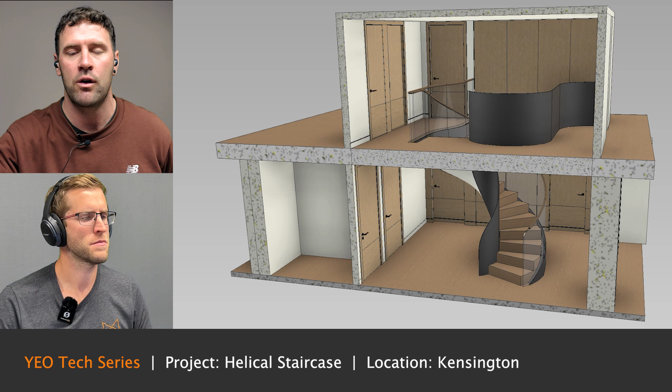Hello, this is the YEO Tech series where we delve a little deeper into the awesome front end of our business, which is the technical design department. Today we are looking at a very exciting project, a helical staircase that we are currently undertaking on a lovely project in Kensington. It's part of a wider joinery package, but this is the jewel in the crown of that project. This is currently on site, in the workshop and on site.

And we are here today with Rob. Hello, Rob. Hello. All right, buddy.

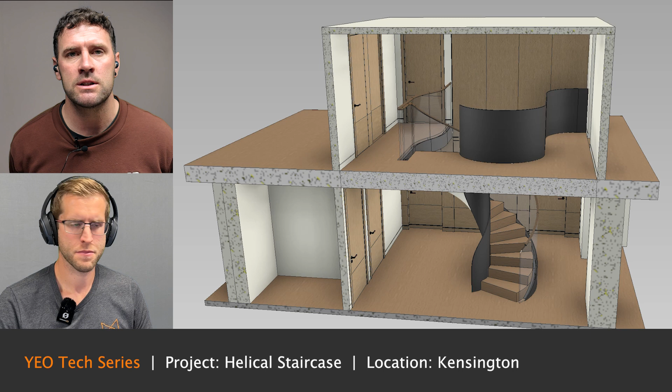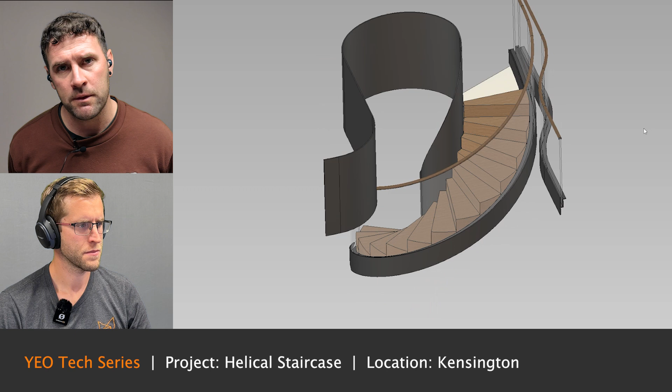Rob is our staircase master in-house, and he has taken the model work of this staircase from point of design conception through to it being made and going to site. Our involvement in this is we were heavily involved in the design of this staircase. It was a collaboration with the architect, RJH Architecture, and very much a development and partnership with them in bringing this to where it is today. We are managing the whole process from working with the structural steel specialist through to the handrail company, curved glass, and everything in between.

This is currently on site. The structural steel work is in, the handrail has been templated, and we're making the treads as we speak. So there's a lot to bring together. Rob, I'll hand over to you now, mate.

How the hell do we start? Where do we start with a project like this? It doesn't look the easiest to draw.

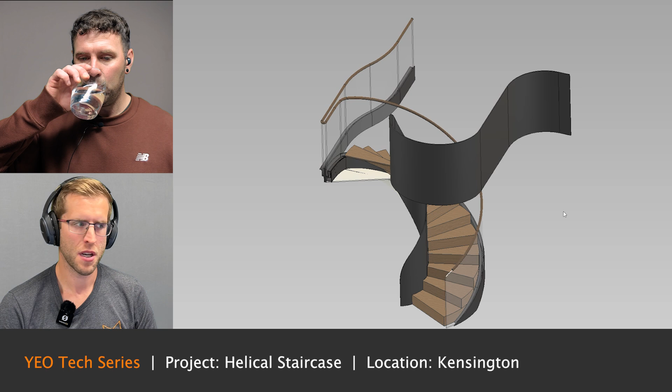No, it kind of didn't follow how we'd normally approach the design of a staircase. We had a design brief and some reference images of what the client liked and the sorts of things they wanted to achieve. So rather than focusing too much on the structural elements and how it integrated with site, I really focused on how to achieve what we thought they wanted from a design and aesthetic point of view, following a few basic principles with regards to a helical staircase. There still needs to be a minimum amount of space, and rise and going still need to conform to regulation. So it was a case of starting with the basic principle that it's a helical staircase.

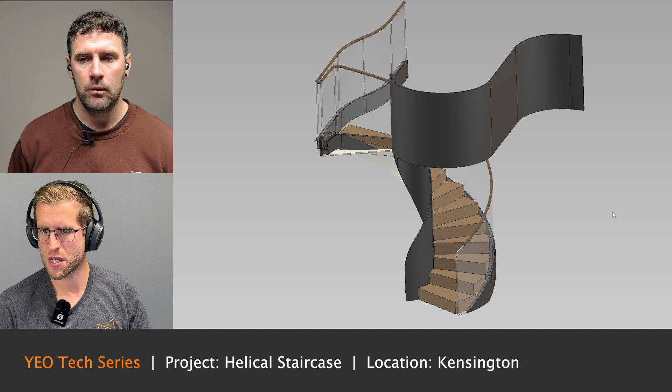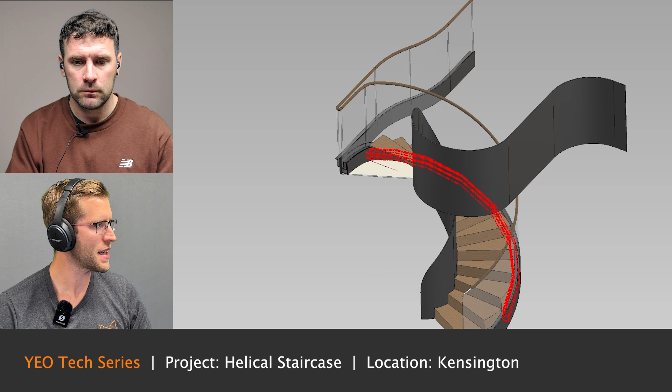We worked quite early on with the specialist metal workers to establish the basic requirements they need, the section sizes of steels, the size of plates, to make sure that from the very beginning we weren't creating something unachievable. One of the first things we did was look at the basic section required for the staircase. So to roll it back, you start with this, which was the section that, through discussing with the specialist metal worker and the design we were trying to achieve, is the kind of section of the staircase that we came up with.

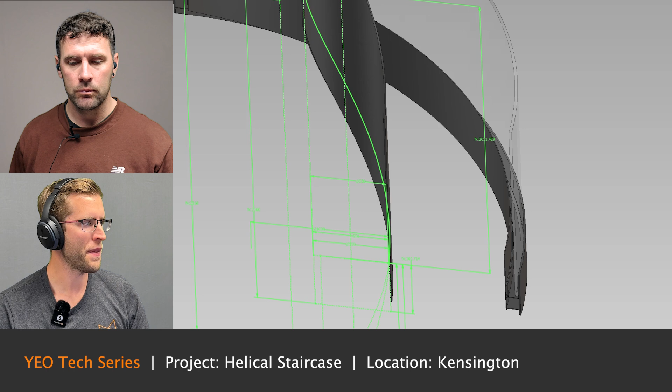And then you combine that with the curve, if you like, of the staircase. Although this looks quite complicated, it really is only a basic kind of radius spread over the height that you have to work with for the staircase. And that forms this spiral, which is the basis of the whole helical staircase. Essentially all you do is take that section and pull it around that curve, and it gives you this form. This went through several iterations.

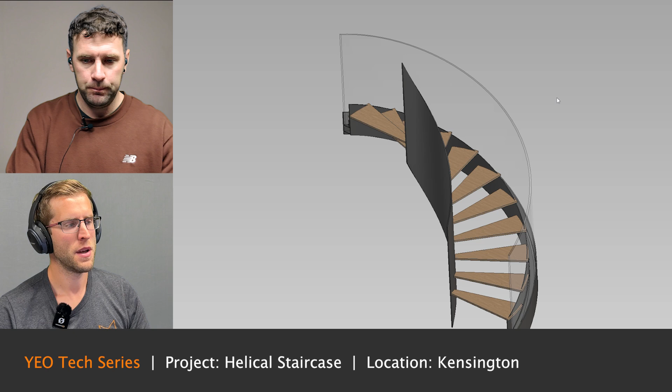It got looked at, revised, and then we started building in more and more components onto that basic form. Each time you add a bit, like the treads, you check that they work and conform to regulations. The idea was to have an equally spaced tread, so they're all repeating, just making sure in principle that worked. Then we kept adding more of the required components and getting it to work visually, always checking that it doesn't compromise what the metalworkers said was required.

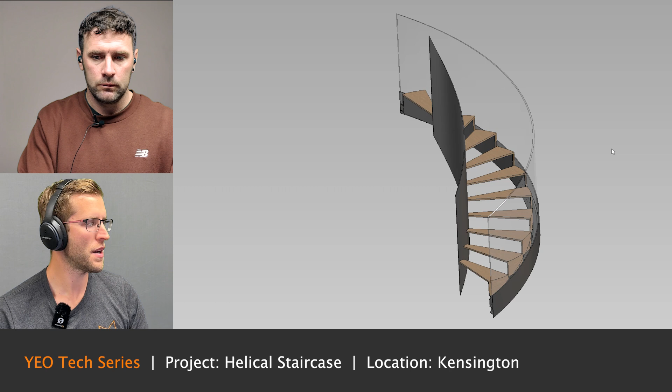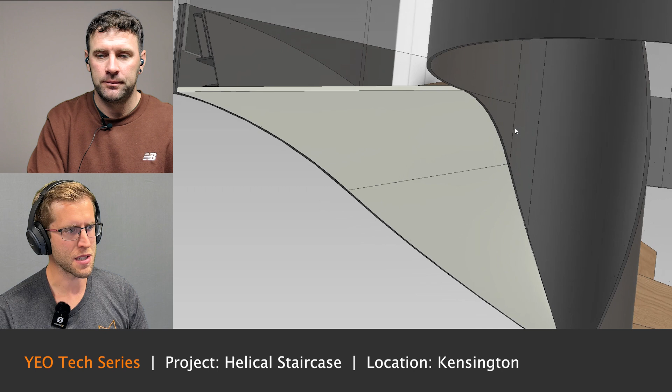And just getting to a point with the model where there was enough information for us to put this in front of the client, knowing that it ticks the boxes for being achievable and realistic. After each review, I think we went through 3 or 4 main reviews with the client, each time making minor adjustments, things like the curve at the top, how that drops, how it meets underneath. These are all small details that got worked through to a point where everyone was happy with how it looked.

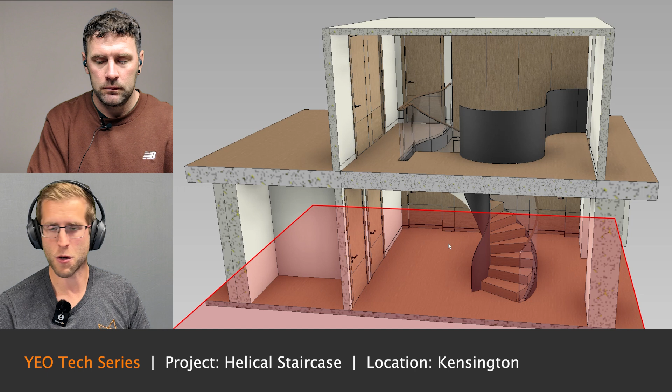One of the key things at a certain point in the process of reviewing the design was making sure within the space it worked. In isolation it's very easy to stand back and view it, but in reality you might not be able to do that. So it was important to put it into the space it was going to occupy, making sure it didn't feel too tight and didn't conflict with other things required in that area.

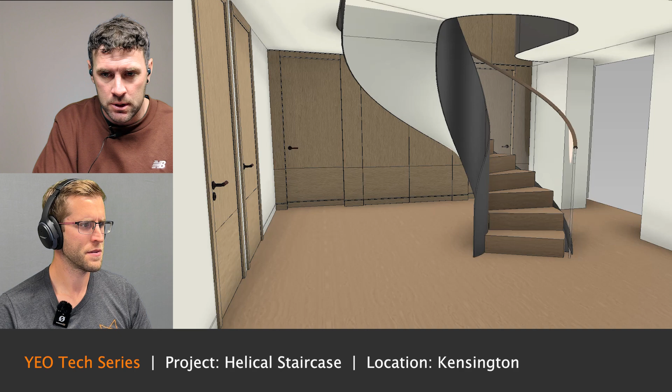It was quite tight in certain spaces, like doors, and this was key because it is quite a tight space there. The client was very keen just to see how it felt and what room they had to move around, and being able to put it in the actual space was genius, really. I don't know how you'd do it without it.

Then it was just resolving the details of how things meet ceilings and walls, and it was all achievable through this design process. We reached a point where everyone was satisfied with how it looked and happy, and we were also satisfied it was achievable. So we're at a point now where everyone's happy, the design has been signed off in principle, and then we pass over to the structural team to work out how the steelwork's going to work.

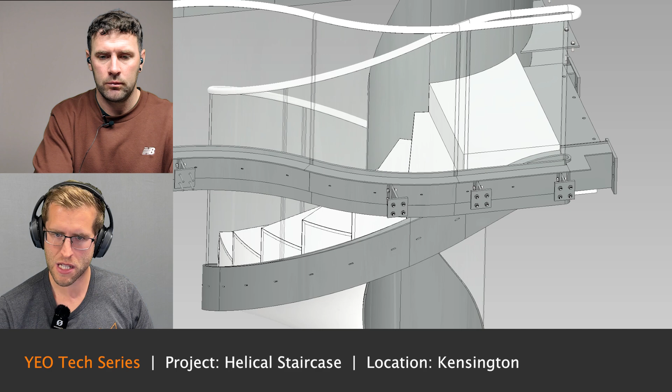So we gave this model to the specialist metal fabricator. They worked in all the manufacturing detail, broke it down into the components they would need to manufacture it, and worked out how it would be tied to all the structural components on site. They checked with structural engineers to make sure the supporting work on site was sufficient, all around the basic design model we'd done. You can see how closely the models match, because ultimately it was developed in conjunction with the specialist, so at the point they received it, very little had to change.

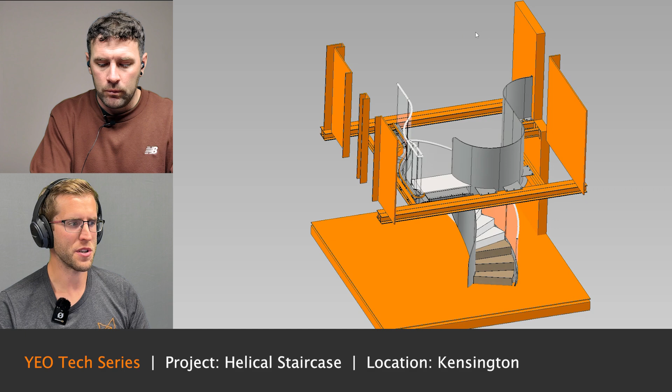So our model was almost dead accurate in the first place, wasn't it? Exactly that - there was very little that had to be changed to get it to work for manufacture and installation. It's quite interesting seeing everything in orange is the site structure, so you can see how the specialist fabricator has considered how it interacts with that, based around the design work we'd done. There was no need to alter anything really, it was just a case of checking and breaking it down for manufacture, which worked really well.

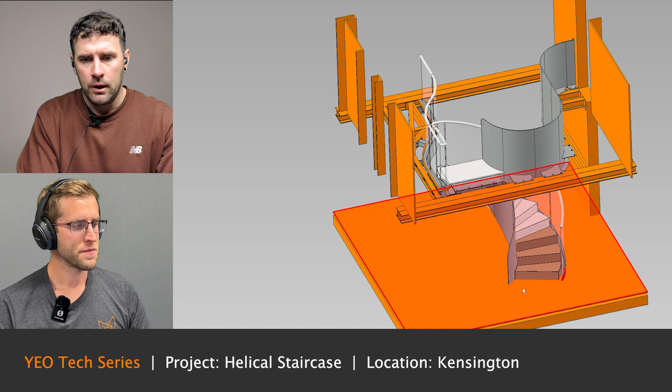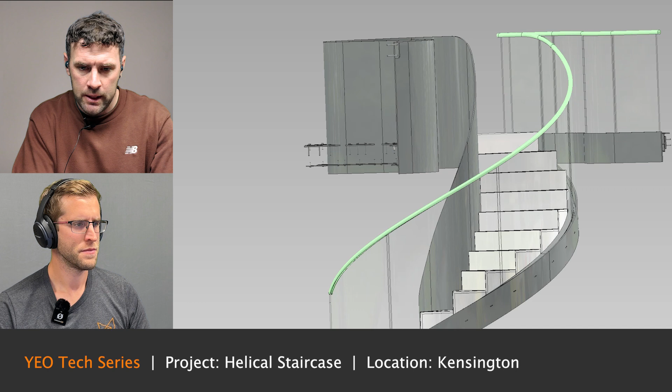Nice, yeah, and that went in on site lovely. That's currently on site - the metalwork that will be on show has been finished in a bronze finish, looking amazing. The glass has been fitted, the handrail now has been templated, and it will actually be leather clad as well. We are currently in the process of making all the treads and risers to go up there.

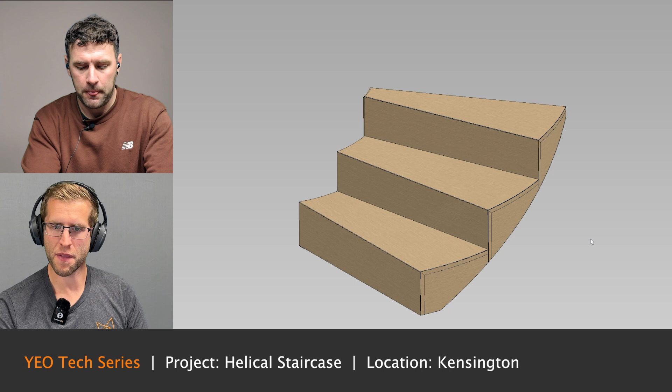So Rob, is there anything else interesting to talk about on this, or are we done? Just a quick one - when the specialist metal fabricator was done with their aspect, they gave us back the 3D model, and that allowed us to detail, based on what we know is being manufactured by them, the timber components that we needed to fit to their metal staircase. It was just a case of taking their model, checking that it worked, and breaking it down in detail for how we would manufacture these components.

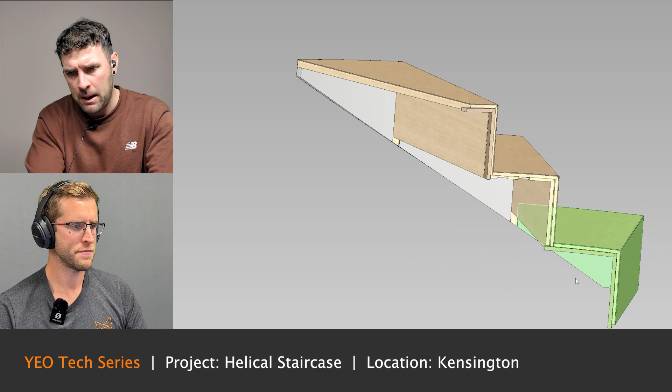And then ultimately placing each tread and riser as a single component. Can we just have a little look? There's a shadow gap we've created on the internal side, so you can see that's there. And the nice thing about it being a repeat pattern - the bottom two are different, and then all of the remaining treads are the same, so we can just make a repeat component.

That was always quite an important aspect of the design, which I'd say we're all but done with now. Ultimately we can do it with confidence, knowing that essentially the metal fabricator has made what they've given us, and it should all go together nicely on site.